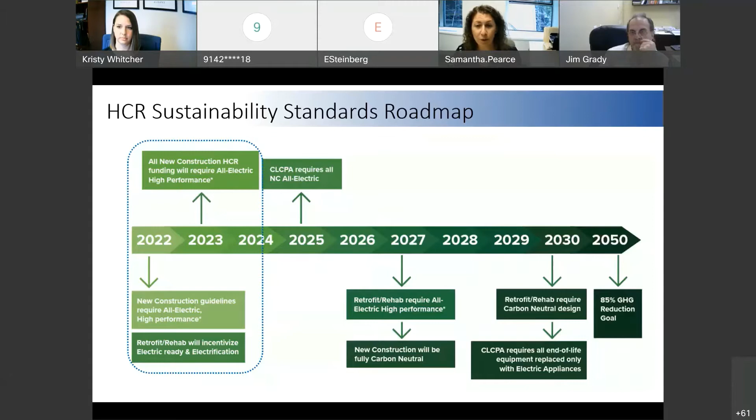And what that means in terms of our goals as a design requirement and how we get towards those goals. As you'll hear from both Kristy and myself today, we've mapped out changes that go into effect starting this year for certain projects, and by 2023 for other programs and projects. By 2023, all of our new construction projects will require all-electric, high performance design standards, and we'll map that out through our training. This map is located in both our existing building and new construction guidelines, so we're hoping that's helpful as you plan projects both for tomorrow and 5 years down the line.

Getting into the guidelines books themselves, we're excited to have updated and created a new sustainability landing page, which you can find at hcr.ny.gov/sustainability. If you go to that sustainability landing page within the New York Gov site, you can click on the sustainability guidelines box, represented here on the left, about halfway down the screen. From clicking that link, you'll be able to download these 2 books directly. We will explain the difference between the existing buildings and new construction books, but we have separated out the booklets because from a sustainability perspective, there are different targets for new construction and existing buildings. We've hopefully clearly mapped out the path we're expecting folks to follow here.

So I will turn it over to Kristy at this point to get into our construction types. Okay, great. Thank you, Samantha.

So in order to ease navigation in the sustainability guideline requirements, we've defined 5 basic construction types that are used in both booklets. These are based on categories we typically see in projects pursuing funding. The terms are defined in both the new construction and existing buildings booklets, and they relate solely to the application of the sustainability guidelines, not to define project requirements or scopes outside these criteria. The first one is new construction, the simplest of them all, defined as the ground up construction of a building or buildings.

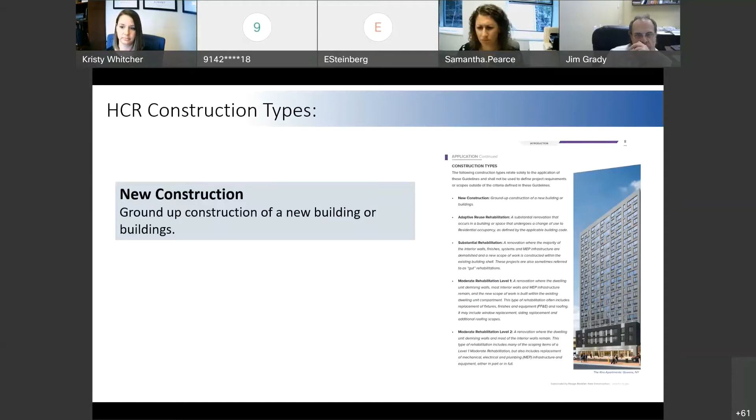The next type is adaptive reuse rehabilitation, defined as substantial renovation that occurs in a building or space undergoing a change of use to residential occupancy as defined by the applicable building code. As we delve further into these design guidelines, you'll see that adaptive reuse projects have many of the same requirements as new construction. The next type is substantial rehabilitation, defined as renovation where the majority of interior walls, finishes, systems, and MEP - mechanical, electrical, and plumbing - infrastructure are demolished, and new construction scope of work is constructed within the existing building shell. These are often referred to as gut rehabs.

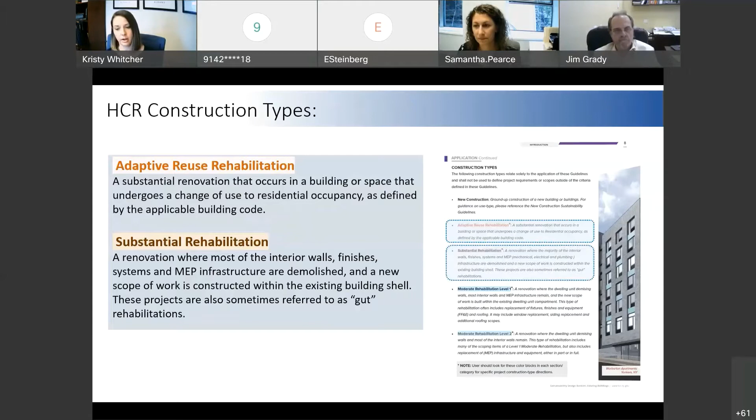And finally, moderate rehabilitation. The designation of the 2 types of mod rehabs is something new to HCR, but will only be referred to in the context of the scoping requirements for the sustainability guidelines. The intent of creating 2 different levels of moderate rehabilitation was to more closely match the various types of moderate rehab projects we see coming in for funding. The first type, level 1, consists of renovation where the dwelling unit demising walls, most interior walls, and MEP infrastructure remain, and the new scope of work is built within the demising walls.

This type of rehabilitation often includes a replacement of fixtures, finishes, and equipment, and roofing. It may also include window replacements, siding replacements, and additional roofing scopes.

The second type of moderate rehabilitation is level 2, which consists of a renovation where a dwelling unit's demising walls and most of the interior walls remain. This type of rehabilitation includes many of the scoping items just discussed in the level 1 mod rehab, but it also includes the replacement of MEP infrastructure and equipment, either in part or in full.

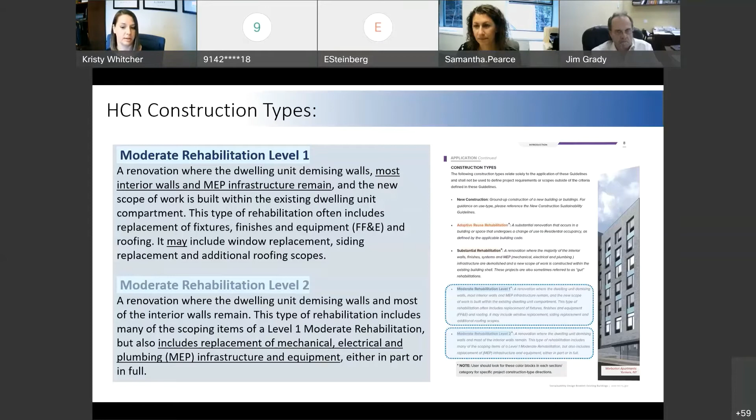In general, the differences between level 1 and level 2 is not so much how large the scope is, but what scopes would render a higher energy savings for the project, specifically targeting more MEP infrastructure and equipment.

Moving on to application of the sustainability guidelines, there are currently 3 paths to financing under the multifamily finance programs that these guidelines would be applicable to: the multifamily finance 9% LIHTC RFP, also known as the 9% competitive process; the multifamily finance 4% tax exempt bond and subsidy financing under HFA; and the multifamily finance open window CIF standalone financing.

In these guidelines, you'll find this chart shown on the screen right now, meant to help development teams navigate the applicable booklet and criteria. Under the project types, there are the 5 types of projects we just discussed, with the booklet applicable to them being either the new construction sustainability guidelines or the existing building sustainability guidelines.

When there's a mix of construction types in one project, we provide guidance on that as well. For a project proposing to build a new building and rehab a separate existing building, you'll utilize the guidelines that match each building type. For a project that may be a single building with a mix of new construction and existing building rehab, you would follow an adaptive reuse guideline course.

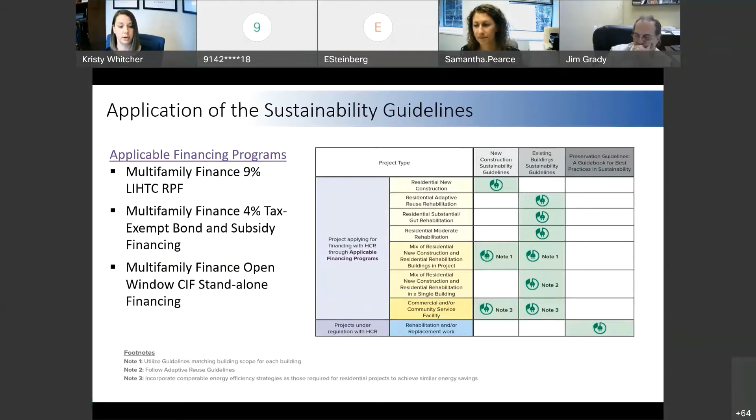Now the big question: when are these sustainability guidelines applicable? For projects planning to apply for the 9% RFP, these guidelines will be applicable to the upcoming anticipated fall 2020 9% LIHTC RFP.

For projects planning to apply for financing with HFA through the 4% tax exempt bond and subsidy financing program, we expect projects planning to close in December 2022 to comply with these guidelines. We also encourage any projects that can feasibly implement these measures into their design to do so as soon as possible.

Now I will hand this back to Samantha to dive into the structure of the booklet.

Great, thank you, Kristy. And again, if you do have questions, feel free to pop them in the chat. I know we're going quickly, but we want to make sure we get through everything and have time for questions. So both the existing building booklet and the new construction booklet follow a very similar structure, with 3 discrete sections in each booklet.

Section 1 will reference and ask the team to look at which third-party certification they will want to follow. In the existing buildings booklet, this is broken down by the construction types that Kristy just went through, but follows the same format.

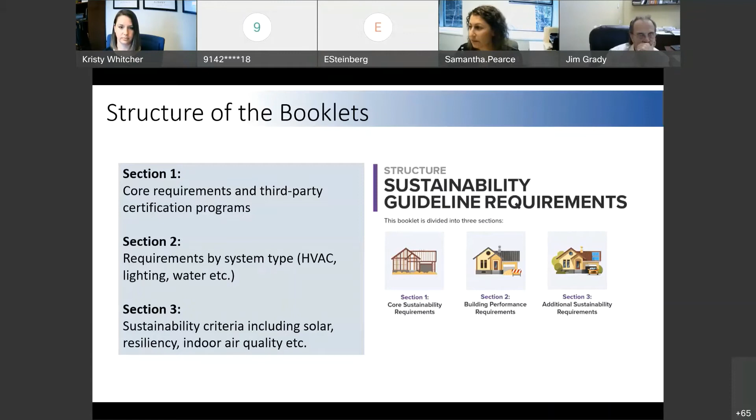Within each section, we follow the same format in terms of each section having what we call a baseline requirement, which means in order to get funding for the project, you need to comply with at least one of the baseline requirements. So for instance, in section 1, where we ask you to choose a third-party certification, you need to choose at least one of the mandatory or baseline requirements in that section.

And then you'll notice below that there will be, within that same area, a stretch criteria. That is optional. We encourage all development teams to reach towards those stretch goals, but you are not required to comply with all of the stretch goals in the booklet. You are also able to reach some stretch goals in some areas and not other stretch goals in other areas, depending on your project or program's specific needs. So if you choose the stretch goal under section 1, you're not obligated to then follow all of the stretch goals throughout the booklet. But again, we do encourage teams to reach towards that.

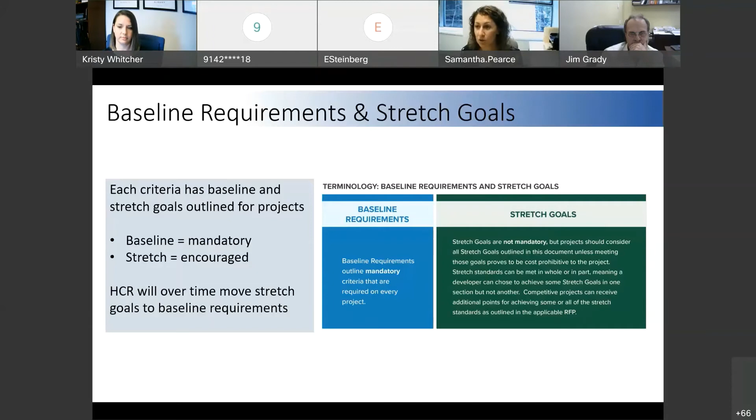So you'll notice throughout both the new construction and existing building document, we've tried to wayfind through graphics. So your baseline requirements will be noted with some blue text and hopefully be clear in that way, and the same with our stretch goals being in green. So we hope that that is somewhat easy to navigate.

So within our new construction booklet, wanted to give you a little bit of a preview of some of the high level direction that we're going in, which is within section 1, which is again our third-party certification section.

For new construction, we will be requiring all new construction, again that's ground up, to be all electric, meaning all appliances and heating systems need to be all electric systems, and choose one of the baseline criteria that's listed in the baseline requirements. A lot of these in this area come from what was formerly known as Appendix F within the design guidelines. So there's not a huge change, although we've added some additional certification standards that we think are equivalent. And then you'll see as an example what the stretch goals for the certification would look like.

So again, if you are a developer and you are choosing to go with a stretch goal, you do not also need to comply with the baseline in section 1. So you would not need to get 2 different certifications. That's one uniqueness about section 1.

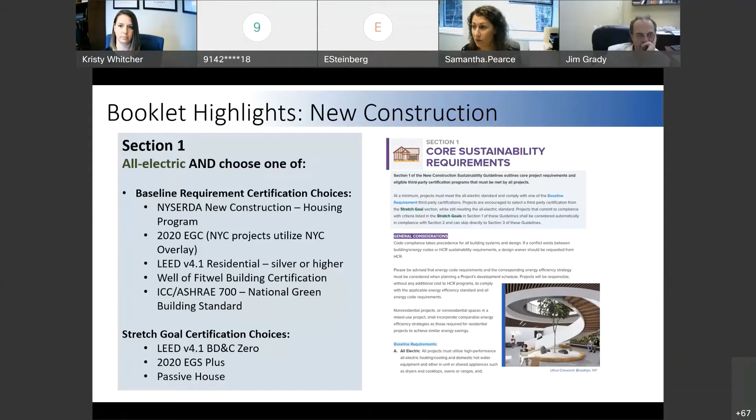In new construction only, if you choose a stretch third-party certification standard in section 1, you can skip section 2. So in other words, your choice of a section 1 third-party certification stretch goal is your fast pass to go from section 1 and then just comply with section 3.

Then when you get to section 3, you need to comply with at least the baseline standards in section 3, but have the option then to also comply with or choose the stretch goals within section 3. So again, this is for new construction only, that you have that fast track pass to skip section 2 if you choose a third-party certification stretch goal from section 1.

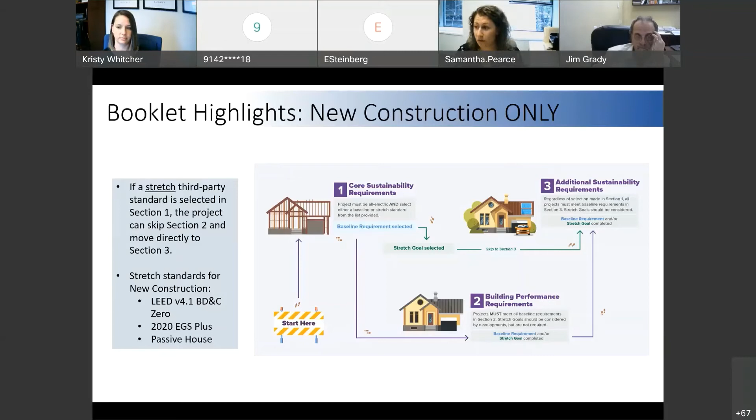And I will turn it over to Kristy to walk us through the structure of existing buildings.

Great, thanks, Samantha. So some of the booklet highlights that I wanted to give for the existing buildings booklet has to do a lot with another wayfinding strategy that we implemented into it. And the reason for that is because this booklet contains 4 types of projects: adaptive reuse, substantial rehabilitation, moderate rehabilitation level 1, and moderate rehabilitation level 2. This was an attempt to ease navigation, and we color-coded the text in the various project types in the existing buildings booklet to help with this.

As you navigate through the booklet, you should be able to easily identify the applicable project type and the criteria that applies to that specific type. For instance, in the section for thermostats and controls, you would find a section applicable for moderate rehabilitation level 1 and 2, and a section applicable for adaptive reuse and substantial rehabilitation, each with different criteria. Where criteria is not specifically called out as applicable to a construction type, it applies to all projects.